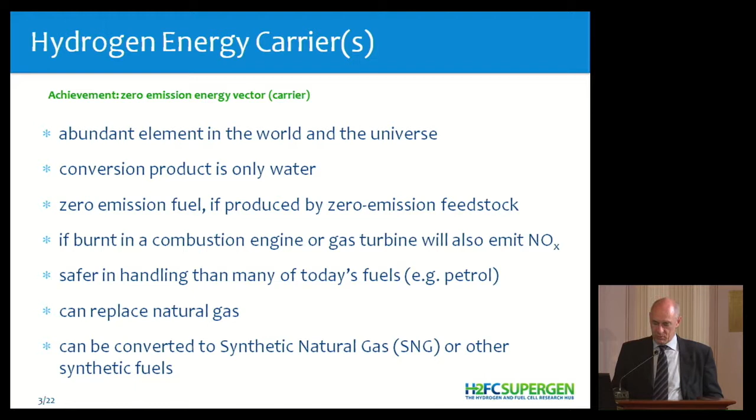So this is a purely electrochemical reaction. Essentially, it's the same as if you burnt the hydrogen, but run in a different way—it doesn't do the detour with a thermal process, so we don't have all the problems we have with Carnot efficiency. That's all out of the question. A fuel cell could theoretically, but purely theoretically, be 100% efficient. Of course it never will be, but it can get as close as you can get to it. So we're not limited by the Carnot efficiency.

If you look at the efficiencies of thermal power plants: nuclear power stations by definition are 33%. Very large coal-fired power stations, lignite, are about 30%. The more modern hard coal, 52%. If you have combined cycle, like a steam turbine and a gas turbine, you might get up to 60, 62%. The fuel cell can do 60 to 70% at any scale.

It's a membrane-based process, it's just surface—the more power you need, the more surface you get. It has nothing to do with volume. Thermal processes are volume-based. So nothing can stop us from having a very small fuel cell, 1 kilowatt, at 60, 65, 70% efficiency net to the grid. It could also be a multi-megawatt unit. That's the beauty of fuel cells. Of course, if you get very small, you'll have system losses, so it won't be quite as good.

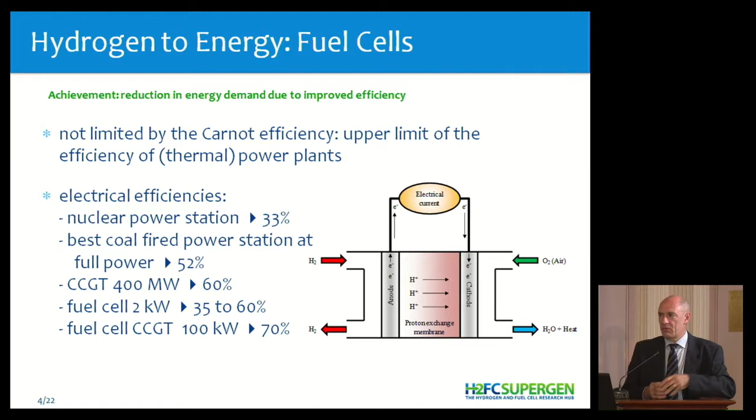Now looking at applications here, application in transport. Transport is one of the meanest parts of energy conversion—it has the lowest efficiency of all. The overall conversion efficiency of a diesel engine is 20%, petrol engine about 18, maybe they're pushing towards 20 and 22 now, but that's it. That's the total efficiency of driving, say, 100 kilometers. It's not the best point of the vehicle because it will never be in that best point.

And if we electrify the vehicles, of course we get a completely different efficiency. A battery electric vehicle would have anything like between 60 and 90%. And what we do here is we just produce the electricity for the vehicle on board from hydrogen, so with hydrogen we're not limited in range as we would be with a battery. A kilogram of hydrogen takes us minimum 100 kilometers, so a normal passenger car would take on board 4 kilograms of hydrogen and could go up to 600 kilometers. It's a very similar range and very similar handling to what we have today, and the filling of the vehicle is the same—it's 3 minutes.

Which maybe is not a good thing, since essentially you just continue using cars as you would do today, and you would wish that it would progress in a different way. But it's a way of replacing conventional vehicles and introducing local zero-emission drivetrains.

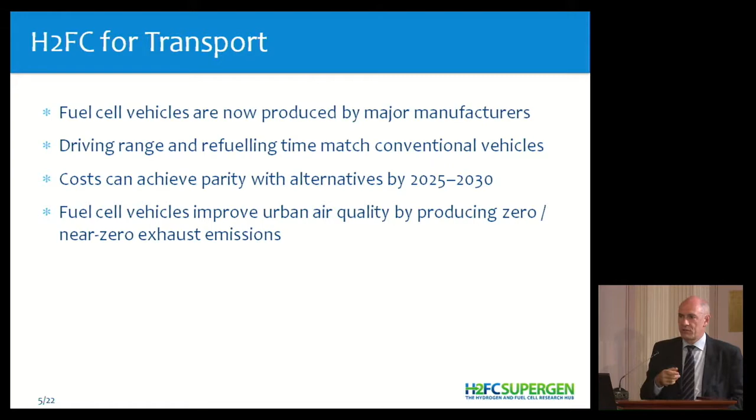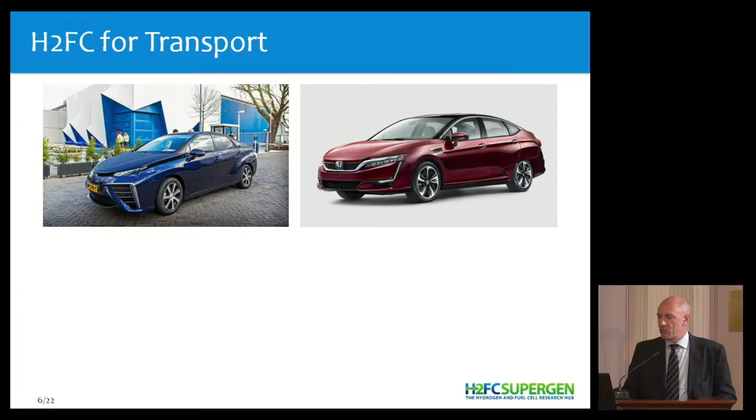Very interesting, because forklift trucks are often used indoors, so in stores. If you have food stored in stores, you're not allowed to drive with any diesel engine. You have to drive with a battery vehicle. And the battery vehicle is the first thing you want to get rid of, because it runs around 8 hours on a shift. If you have 3 shifts, you need at least 2 of these forklift trucks, so it's a large investment. The charging station has to be hydrogen-proof because you release some hydrogen from the batteries when you charge them. If you charge overnight and the grid fails, you have no transport in the morning, you lose a lot of money. So the fuel cell vehicle would be the exact ideal replacement for this, which can also run indoors.

Trains was explained already, buses was explained already. This is real markets coming up. And here we have a sort of market pull. So Heinrich Klingenberg in Hamburg put together a list of 1,000 buses, which could be instantly ordered across Europe if the price was adequate, but if you ordered 1,000, you would get a proper price, and went around trying to find a manufacturer who would be prepared to deliver these 1,000. And Daimler just said, no, not us. And he's been running around with this list for, I think, nearly the last 10 years or so.

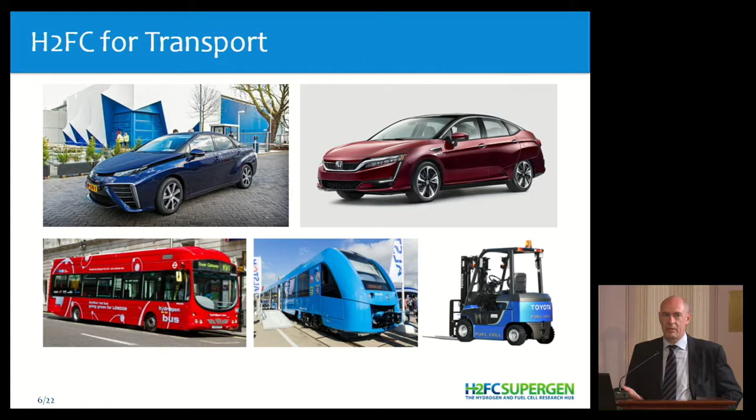And as I said, the efficiency is extremely low. 85% of the transport fuels are imported. So if we have a problem, it's transport, and it's the only sector which is still growing. Everything else is actually going down. Efficiency in industry is increasing. Efficiency in households is increasing. Transport is just not increasing in efficiency because engines are getting bigger, cars are getting bigger. Everybody wants an SUV. I never understood why, but okay. And it's more and more mileage, more kilometers driven. So this is the only sector worldwide that is still growing.

And heat is about a factor of 3 higher. And nobody's really looking at this. And the UK government has now woken up a little, and they're looking at decarbonizing heat, maybe understandable because the building quality is so bad, you have to look at the heating system. Every other country in Europe is looking at improving the quality of the housing. In the UK, that is a very touchy subject.

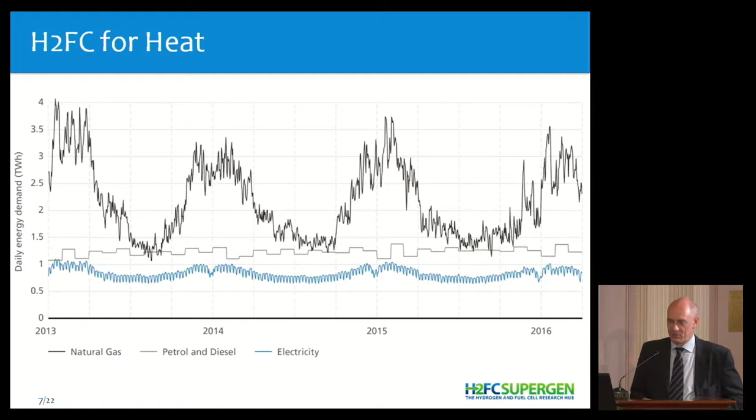So, if we use hydrogen in fuel cells, of course, we can decarbonize heat. We could use hydrogen in a stationary fuel cell to produce heat and electricity. I'm not too fond of that. I don't think it's the most intelligent way of doing this. But we could also use natural gas or synthetic natural gas, methane, and essentially have zero carbon heating systems.

You could also talk about district heating, things like that. It's not exactly the most favored in the UK because they have this very individual set of mind. But you get something like a transitional technology. You could work on the natural gas grid as it is now, and you can convert the natural gas grid, as I'll be showing you a bit later.

And so you might use hydrogen as such, but you might also use hydrogen in the form of synthetic natural gas. Then you don't have to change the network, you don't have to change the appliances. You get higher efficiency at end of use, you spend a little more energy up front, and it's more versatile.

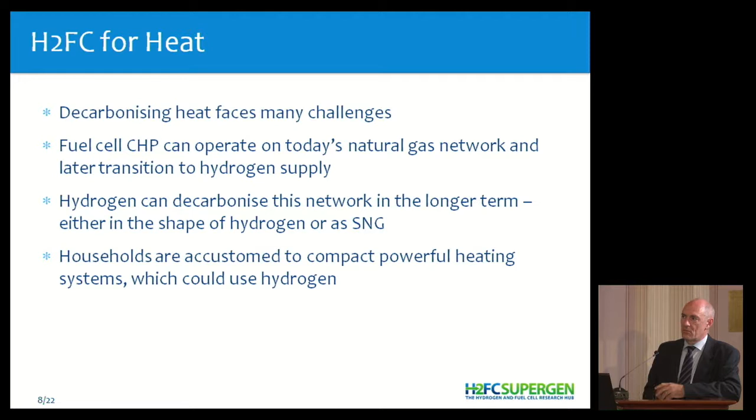You can also use hydrogen just for electricity generation or some sort of hybrid, because the fuel cell will always be producing electricity and heat. So electricity being the prime product, but of course, as any other thermodynamical process, there will be losses in the form of heat. So you have this combined heat and power, or you just have power as such, which is shown on the left.

So there's lots of appliances nowadays. You have lots of internet-connected things, lots of data you're storing somewhere. There's nothing worse than having a data center in California and having the grid fail every other month or so. So Amazon claims if they go down for an hour, it costs them, I don't know, $10 million, $100 million. I can't quite believe that. So it's loss in sales, but then of course it's just shifted. People will order an hour later or something. But they are very much interested in having a backup.

So as of now, they have to pay for diesel engines, which will be running continuously in hot standby, to be able to ramp up. You need very large batteries, so why not use a fuel cell? And Bloom Energy has been able to make, to some extent, a business out of selling, or at least leasing. I think they only sell the energy nowadays. Very large combined units. So one unit is 100 kilowatts or 200 kilowatts, and they place something like 10 or 20 units. And then they have a multi-megawatt backup.

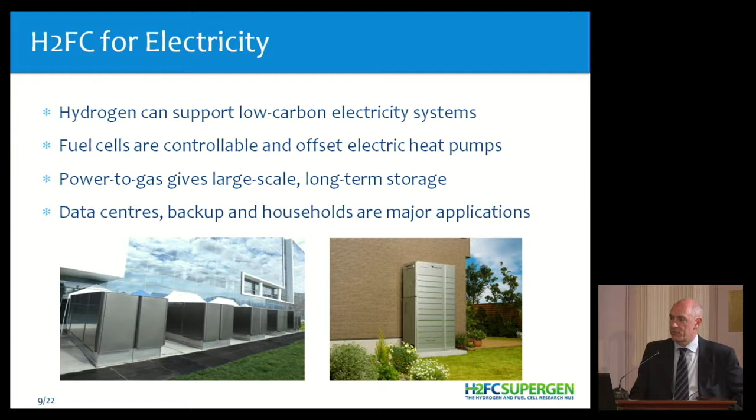Now, there's a couple of unique things about hydrogen infrastructure. The first thing is it's a gas, it's not electricity. So all the problems we have with balancing electricity grids with input of renewable energy, I'm not saying they're not existent here, but they're at a totally different scale. A gas grid is ideal because with very little fluctuation in the pressure of the gas, you have the gas grid itself as a storage. So in the normal gas grid of a European country, you have about 3 days worth of storage. You don't need a cavern anywhere, it's just the gas grid as such. You pump up the pressure a little, and it just takes up the extra.

So, having hydrogen as a gas is a benefit, and you don't need this very instantaneous balancing between demand and production.

So what we see here is, say, a centralized production of hydrogen. We have very large plants. On the left, we have different feedstock. I'll be expanding on that in the second talk a little. Different ways of producing the hydrogen from anything that is a hydrocarbon. So a hydrocarbon will naturally include hydrogen. So it could be electricity, it could be methane we convert to hydrogen, it could be even coal. And then we feed this into a hydrogen infrastructure. So you could have the idea you convert the natural gas infrastructure into a hydrogen infrastructure.

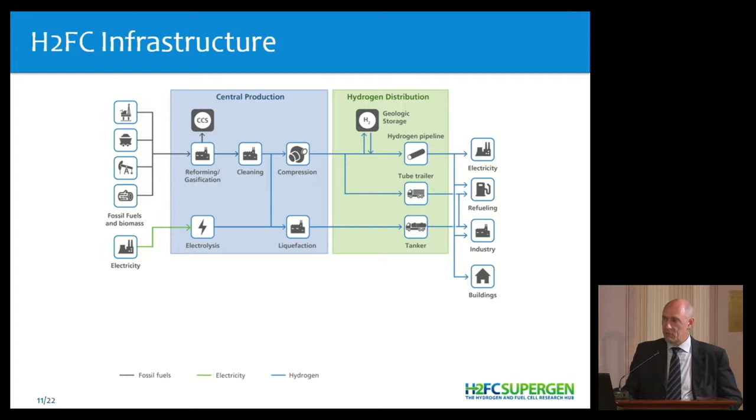And then we have the hydrogen distribution on the right, and then we have all the applications from industry to vehicles to households. You could also shortcut some of these things by using not a pipeline, but vehicle transport, so tankers. But you could also have the production locally. So you could use the electricity grid to transport electrical energy and locally turn this electrical energy into hydrogen with an electrolyzer. You could do this centrally, you could do it locally, and this gives you a bit of an insight into the flexibility. So hydrogen gives you a lot of flexibility.

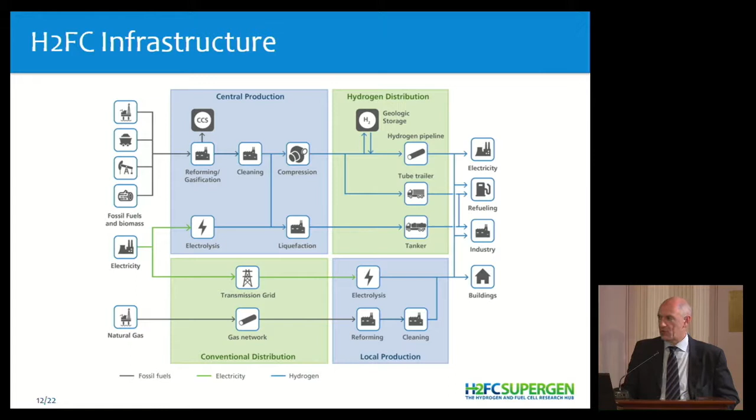And then, on the right it connects, so you have all the end use on the same bus bar, if you like. And that's another way of putting this. So essentially what you're doing is you're connecting the electricity grid and the gas grid. So you're producing gas from electricity. So all the problems we have with excess energy production from windmills, all the discussion in Denmark or Germany, you can just cut short. Because if there's too much electricity in the grid, you turn it into gas. And this gas you can transport around at much less effort, much less losses than electricity. You can store it, and you can take it out of the electricity market and put it into the transport or to the heating output.

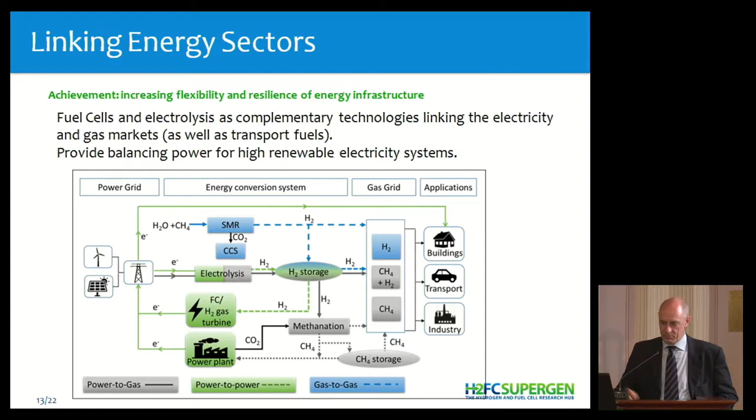So this is what you call power to gas, or this linking of energy sectors, or sector coupling, or whatever term is being used. And in the end, you could turn the hydrogen back into electricity if you wanted. It's not a very great total turnaround efficiency. It's something like 35%, so it's similar to what you have in compressed air storage today. If you improve the efficiency, you could also go up to maybe 60, 70% in total with a couple of tricks. But the main message here is you can combine the different markets of energy, and it gives you a tremendous flexibility. So if there's too much in one sector and a demand in the other, you can just shift. But I'll come back to that a bit later.

Now, of course, there's a cost premium. This is sort of simulation results from University College London. Don't quite believe them because it's a MARKAL model or TIMES model. Essentially, output equals input. So whatever you put in as assumptions, you get as a result. They present this as hydrogen is not more expensive than anything else. So the case to the right is all electric. It's the current discussion, which I think is past already, the hype's gone. We'll do everything electric. We'll have heat pumps, we'll have electrical heating, we just don't need a gas grid, all these things. And then you have this huge problem of storage and balancing.

If you use a gas grid, it's different. You have an automatic storage and you have this possibility of shifting between sectors. So I think this all electric has gone again. It's cheaper because the infrastructure might be cheaper. I'm not sure it is because you have much more balancing power you need in the end, which you don't need in a gas grid. And a gas pipe is incredibly cheap, much cheaper than an electric line. So the message here is if you go for hydrogen, it's not more expensive in the long run. This is a view to 2030.

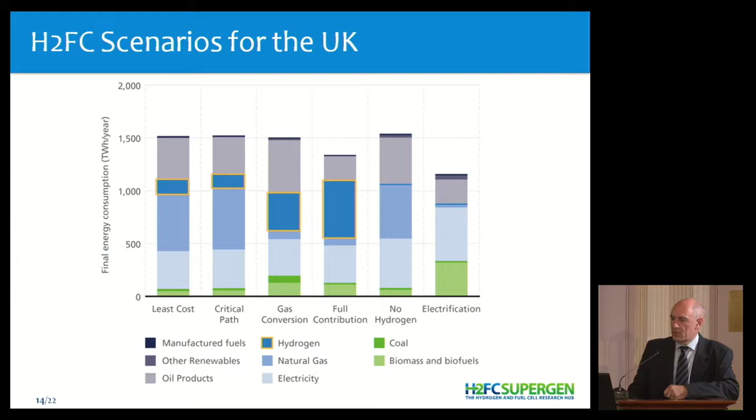And the other point Bart already mentioned is as you increase the numbers of units, the price comes down. So this is a double logarithmic scale, a learning curve. You've seen this for photovoltaics, you've seen this for electronics, you've seen this for personal computers. It's always the same. And the slope differs. So in electronics and personal computers, it's like every 2 years, it's a factor of 10 or 100 or whatever. But you see, it's tremendously going down. And this is relatively realistic. As numbers go up, you can see that the cost actually does come down.

There could be some surprises. So there's been some examples of companies that got stuck. A very early company, UTC, they couldn't go below $4,000 per kilowatt, and that just got them stuck, and they went out of the market. And you can also see there's differences; the lines here are for South Korea and Japan. As Bart already pointed out, we are overtaking Japan just now. And so the European companies will be able also to match these curves.

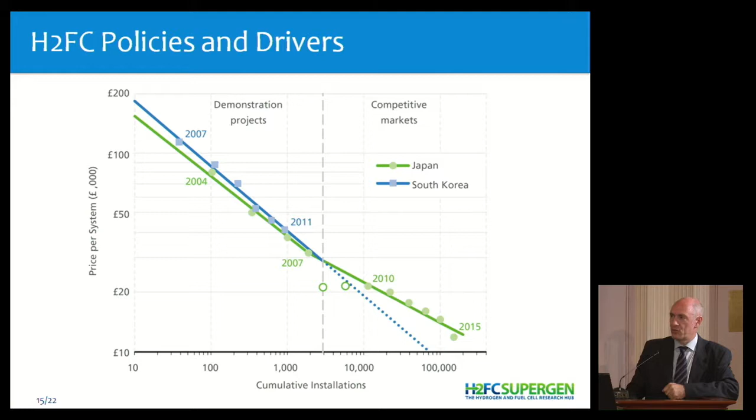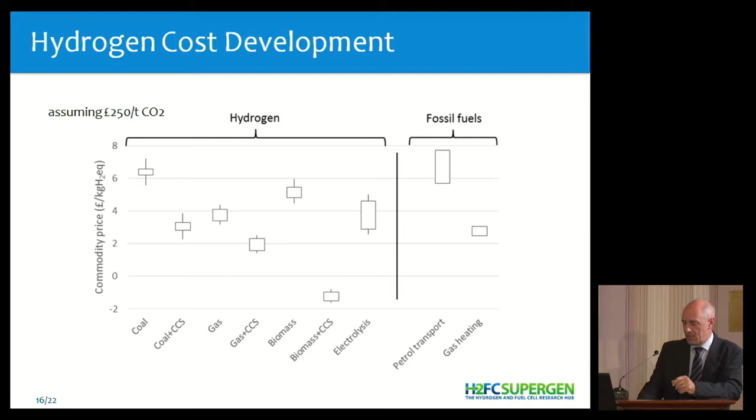Again, cost calculation from University College of London. If you put a CO2 premium cost, 250 pounds per ton of CO2, hydrogen is cheaper than any of the other options because the release of carbon dioxide gets incredibly expensive. But then, of course, 250 pounds is what we've always said is necessary. But I think we're far away from that. But of course, if governments have to act on clean air and pollution issues, this might happen earlier than we think.

Now, cost is an issue in itself because what is cost? Essentially, cost is what a customer wants to pay for a service. But a customer doesn't necessarily want to pay for a service what the value of the service is. Partly, they only want to pay what they're sort of offered, if you like. So typical Amazon, they offer something for free for 2 years and suddenly you pay masses of money once you've got used to this offer. So they build sort of a value. Or things are offered at low prices just to keep competition out of the market. So customer pricing is a bit tricky.

And the other thing is customer pricing in most cases does not mirror the actual cost, the societal cost. So for instance, if we look at energy conversion, of course we have all the cost of inner city air pollution, which is not borne by the driver of the diesel car. So the driver of the diesel car pays for the car and for the diesel. Everything else that comes from health hazards, acid rain, damages to the environment, down to climate change is essentially paid by the taxpayer. So if in Germany and Holland you have to increase the height of the seawalls, it's not the drivers of diesel cars that pay, it's the taxpayer.

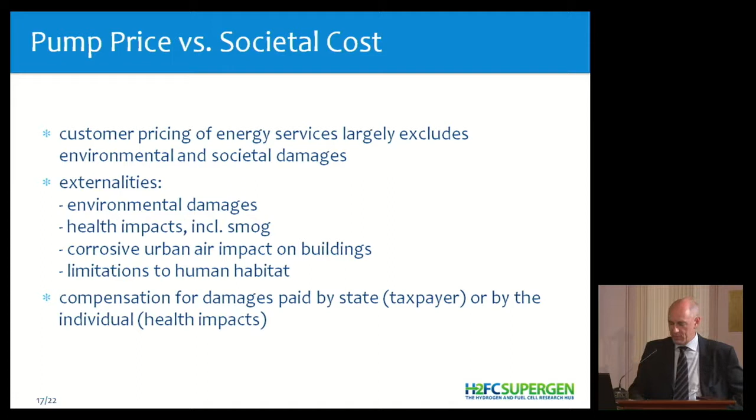So you pay with your health, and in the UK they say there's about 40,000 premature deaths by bad air quality. In London, in the larger cities, in Birmingham too. So we all pay this, and it's not charged to the drivers. It's not charged to the people who run heatings and so on. And if you look at the figures, and they've existed for a long time, these calculations go back to 1985. They were the basis for the feed-in tariff for wind energy in Germany. So the people who fed in the wind energy got exactly this premium, which was at the time 9 cents. It changed later for photovoltaics.

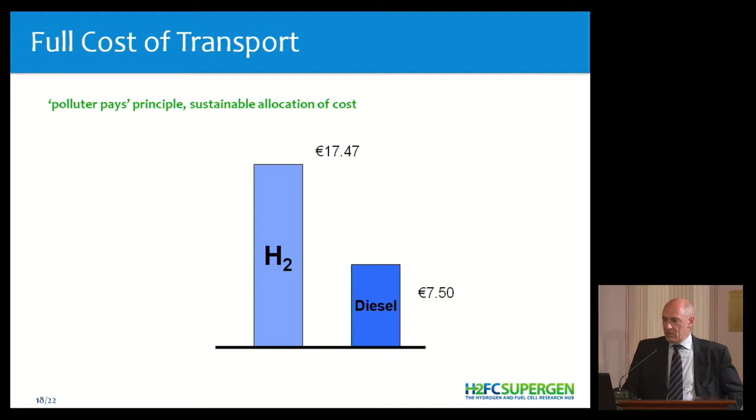So if you look at transport, and this is 10 years ago, the diesel price at that time was 85 cents or something, and it's much higher, it was double of that. So that's 7.5 euros per 100 kilometers driven with an A-class Mercedes. And at the time we looked at a very large hydrogen system, wind energy was about 15. In the meantime, the diesel price went up, the electrolyzer price came down, so that was 2 to 1. And then you add the external costs, and then you draw about even.

So the external cost for 100 kilometers of diesel-driven vehicle is about 8 euros, plus another 5 for building roads, for hospitals, for policing, all that. That's all extra. This is just the cost of the diesel itself and all its emissions. There will be external costs on the hydrogen too, but this draws even. So as a state, as a government, I would have to look at what am I spending in total. So there's some private sector which is taking care of actually running the vehicles, but there's also all the sector I have to compensate in damages.

So as a government, I could say, okay, I have to pay this money, so why don't I get it back from those people who've caused the trouble? Why do I charge everybody, even the pedestrians, for this service? So it's the taxes I take on board, which I can spend. Why don't I charge that to the vehicle owners? And then suddenly the picture totally changes. Then hydrogen is suddenly cheaper because it doesn't cause the damages.

So probably it would give a revolution if you charge this on top of the diesel price or the petrol price; everybody would go through the ceiling. Why is this so expensive? Of course it's expensive, because that's the total cost. It's just you're pretending it's cheaper. You've been fooled, you've been told it's cheaper so that you can be sold the petrol.

Because if the oil companies hadn't sort of shifted this cost to the state, they would have to charge it. So they're just exploiting the state, they're exploiting the citizens. If they were charged the proper price... and that's why we're just not progressing, because we're looking at fantasy prices of conventional energy.